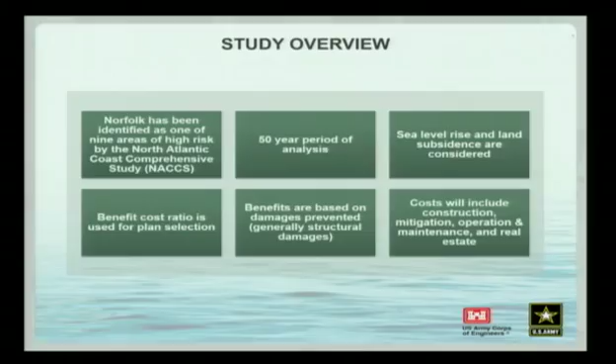It is, however, important that all understand that as we do that, the results will potentially provide the foundation for what may end up being a locally preferred plan, because our goal is to reasonably maximize national economic development. It becomes a matter of benefits and costs, but in addition to those, we're going to, as a team, collectively consider issues such as life safety, risk reduction for historic structures, protecting low-income areas of the city, and environmental impacts as part of the plan selection process.

As you might expect in a federal undertaking, there's a process we're following. This process has several important milestones that our vertical chain uses to check our work and see whether we're on track for completion, and ultimately a Chief's Report, which is the document that permits access and construction authorization—those construction dollars.

We've satisfied the alternatives milestone in October of last year. We've also provided a range of alternatives that we're considering, and we communicated our path to achieving a tentatively selected plan.

I want to highlight that there are many future public input opportunities highlighted on this slide with the star. The first will be late 2017, when the draft environmental impact statement will be released for public review, and then again in late 2018 when the final environmental impact statement is released.

But we have on our website the means by which feedback can continuously be provided and received, and we want that, because the best available information is what we want to make decisions and recommendations on.

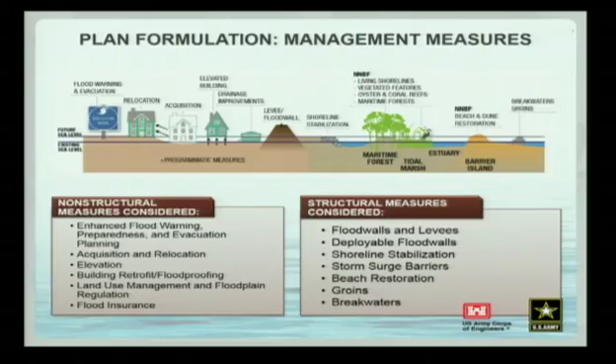Some of the named features, for example flood insurance and flood warning, are not Army Corps action items, but they too are being considered in the process.

Before I transition to Susan and we get a bit more specific, I want to leave you with this disclaimer: everything you're about to hear is pre-decisional, not final. We've made no decisions. I am seeking your input—the input of all that live here and will be the recipients of what I believe is good work being performed. These are things we're sharing now that we're thinking about, and we can only make them better with your input.

It's very important that today, if you forget everything else I've said, please know that your input is desired, and we have a means by which to receive that, and we're happy to get it. With that, I'll transition to Susan, and we'll field some questions when she finishes. Thanks, sir.

Good evening, again I'm Susan Connor, Chief of Planning for the Norfolk District Army Corps. What I'm going to do is go through some more details. Colonel Kelly has talked to you generally about the study and where we are in it. I'm going to talk more specifically about these measures we've discussed, and where we are suggesting those for potential implementation in the city.

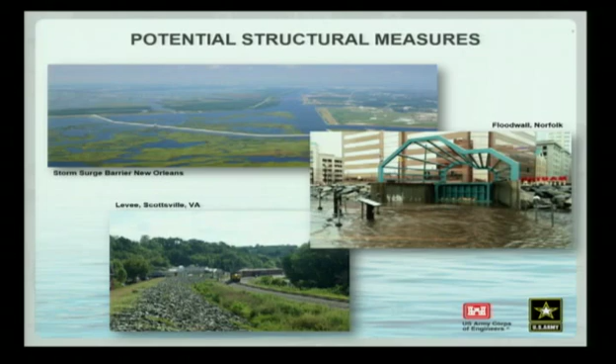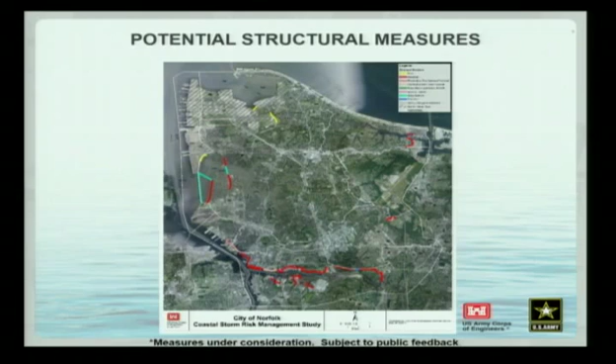Also, non-structural measures. By far the most prevalent non-structural measure being recommended, and likely to be implemented, is elevation - raising a structure out of the floodplain. But I did want to mention some other ones, like non-residential flood proofing, which is primarily for buildings like commercial buildings. Maybe they're higher and you're not going to elevate them, but there are measures we can take to keep the water out, such as closing entranceways or waterproofing them when an event is coming.

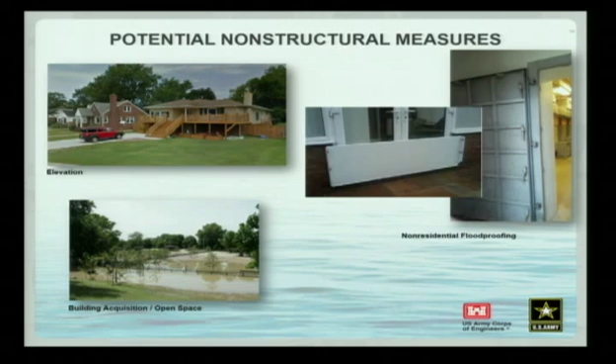And then acquisition is another strategy. I know that's one that sometimes is not well-liked. It's something under policy that we do have to consider. However, it is generally a voluntary program, so it's not something where we come in and force acquisition - it's something that would only be done if the city were interested in it. And it's generally not easily cost justified, so most structures are not viable for acquisition because the cost benefit doesn't work there.

So when we look through the maps, the non-structural measures will be shown with purple hatching. I'm not going to continue to reiterate on each slide where there's non-structural - if everybody can just keep the context that anywhere there's purple is potential non-structural. Those non-structural measures usually can be done with the structural measures - sometimes complementary to them, or sometimes if the structural measure is implemented it means the non-structural would not be needed.

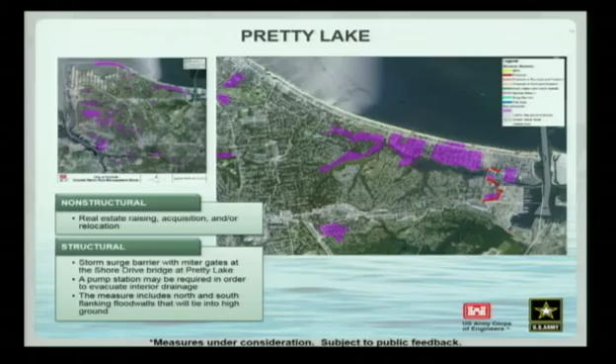So now I'm going to go around the city, starting in the northeast area at Pretty Lake. The measure we're recommending here is a storm surge barrier right along Shore Drive - it's really hard to see, but there's a little blue mark right there. That would have flood walls to the north and south that tie into that storm surge barrier, and as I mentioned, a potential non-structural measure that would work complementary to that storm surge barrier.

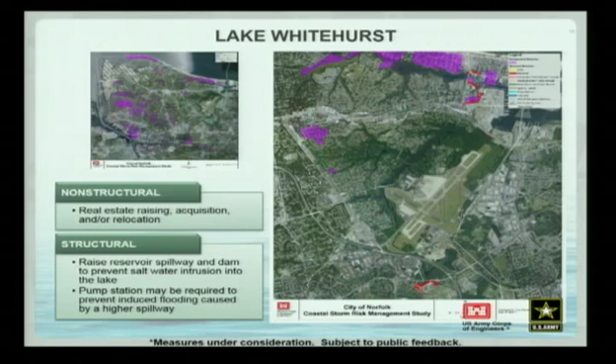So next, Moores Bridges Water Treatment Plant. I wanted to set this in here as an example of critical infrastructure, things defined by the Corps as more important to keep functional during a large storm event. For these, we actually have a higher level of risk reduction we're trying to provide.

We try to protect these to the 500-year event. So there is other critical infrastructure in the city of Norfolk. As we're still moving along this study, we haven't identified everything that would qualify as critical infrastructure, so there may be others, but this Moores Bridges Water Treatment Plant is one that we have identified.

The type of measure we would do to protect this is we consider structural, and it would include a flood wall adjacent to the plant, tying into high ground. So basically building a flood wall right around that plant to protect that critical infrastructure so it could remain functional for the city.

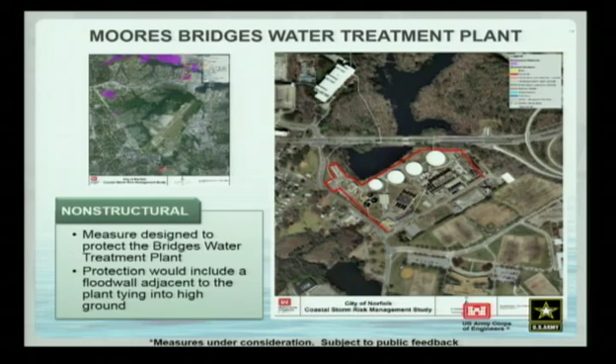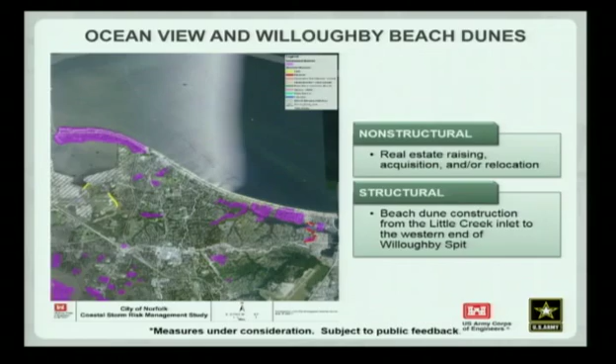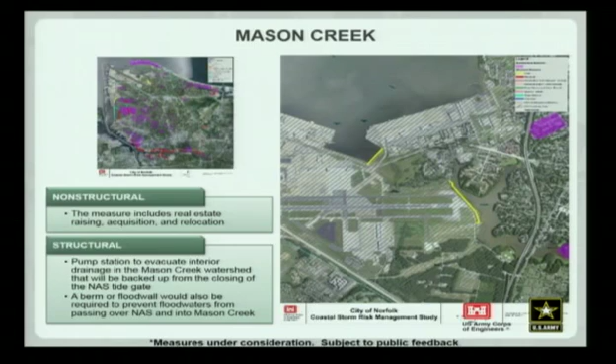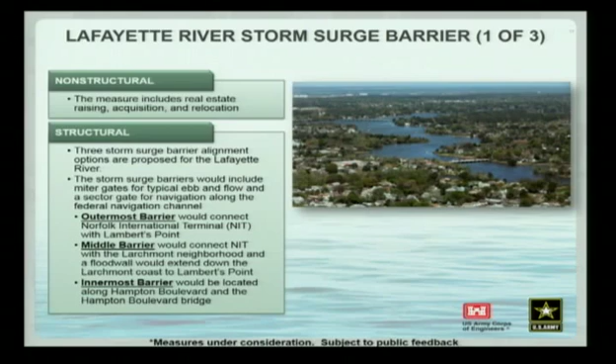To describe the three configurations: the outermost is right here, basically NIT to Lambert's Point, the longest storm surge barrier, going straight down north to south. We have the middle barrier, NIT to Larchmont, right here. This one would have an adjoining flood wall that extends down the Larchmont coast to Lambert's Point. So if we built this storm surge barrier, you would also have to have this flood wall to provide the appropriate protection to that neighborhood.

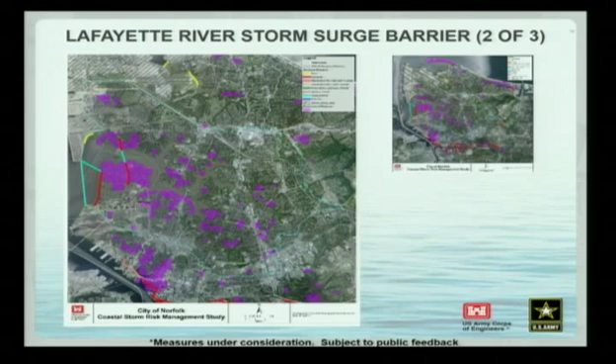The innermost storm surge barrier is along Hampton Boulevard, right at the Hampton Boulevard Bridge. That is the shortest storm surge barrier, but it has a lot of needed infrastructure to go along with it. Flood walls would be needed here along Hampton Boulevard, and those would be concrete flood walls that would run down the median of Hampton Boulevard.

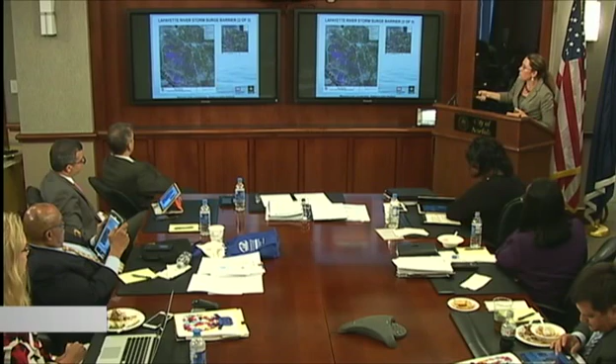Some implications of that is it would disrupt traffic patterns. There's lots of different ways - we're not to a point of design yet where we could say exactly how. You could close down intersections, or you could keep them open and have flood walls that open and close. So that potential measure does have those flood walls needed down Hampton Boulevard.

And with all of these storm surge barriers, I will say it's primarily cost benefits, but we're also looking at environmental considerations, aesthetic considerations, how it looks, traffic movement, and there's a lot of historic structures in the city of Norfolk, so we're very aware of that and doing what we can when we consider this to best protect those historic structures without causing negative impact.

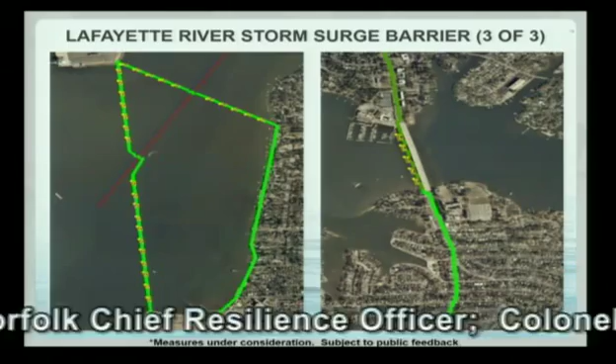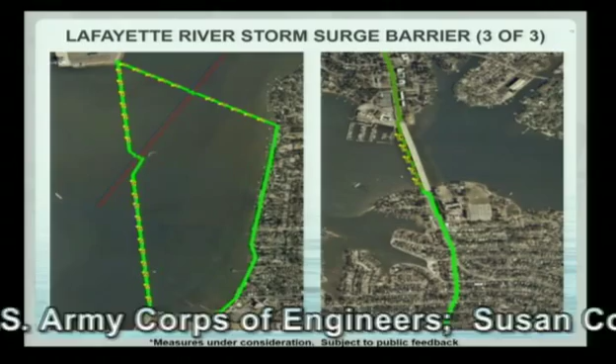This is just a closer view of those storm surge barriers. This is where the Federal Navigation Channel is. That would be the larger gate that would open and close.

In this storm surge barrier, it would be similar to the existing openings, continuing to be open most of the time. The type of events we're looking at for closure right now, we might only be talking about once a year or once every 2 years these structures are closed—not a daily or weekly basis. Because the frequency and intensity of events are forecast to increase in the future, when you look 25 or 50 years from now, these would probably be closing more. We do not yet know how much more, but maybe it's closing a few times a year instead of right now where it might be closing every year or every other year.

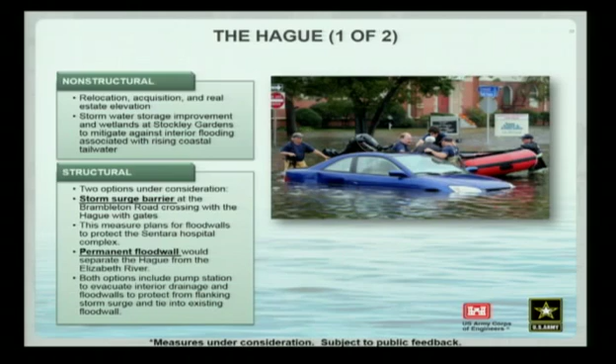The Hague is another area where we are looking at storm surge barriers. It's the only area where we're actually looking at a comparison of a storm surge barrier, as we've already described, or a permanent flood wall right at Brambleton Road to permanently close the Hague off from the Elizabeth River. So those are different options we're considering. This is one area where we're talking to the Coast Guard about their usage of the Hague, and talking to the neighborhood about these options.

Also wanted to point out that the Stockley Gardens area, we're also trying to incorporate some greening of areas to deal with stormwater drainage that would either be caused, say, if we did close off the Hague and had additional interior stormwater drainage to deal with. Obviously we would need pump stations, but we're seeing what we can do with more natural infrastructure in that area to deal with that.

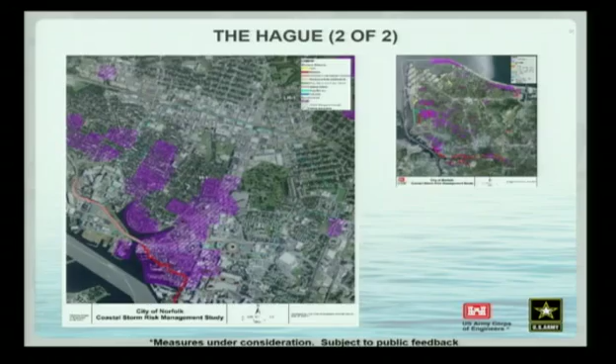It's the light blue line—I can't read the key. There's light blue lines that run through. I believe that's just the difference in our areas. It's just a highlighted area, focusing on just that area. It's not a measure that we're proposing, it's actually kind of a background part of the map.

So downtown in Chesterfield Heights, this area, there is an existing flood wall in the city of Norfolk. We'd be looking at potentially raising that flood wall. That level of detail hasn't been determined yet, but we're definitely looking at additional flood wall through all of this area where the red is.

This is one area where we're trying to incorporate an earthen berm, particularly right around Harbor Park, if there is enough area there that we can do it. That also is kind of complementary to the Vision 2100 that the city planning is doing to try and make some more walkable green neighborhood areas. So we're trying to incorporate that where we can here.

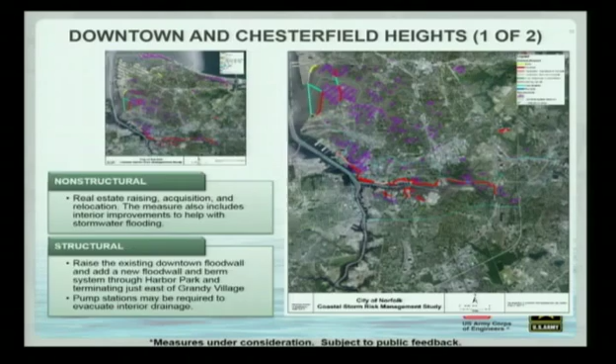So you can see right here, this kind of pinkish color is where we would try the earthen berm area.

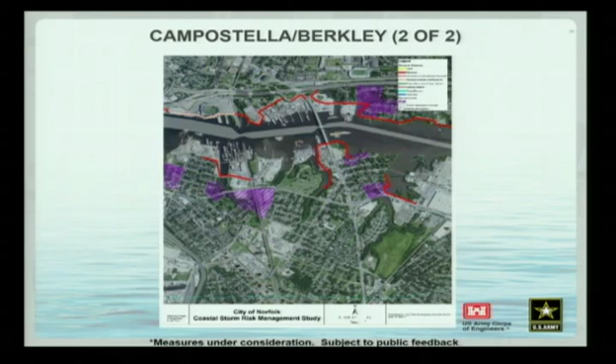So Campostella/Berkeley, here we're looking south of the river, and this really is a flood wall in these areas. Zooming in a little bit, you can see better here where the flood walls would tie in where needed along there.

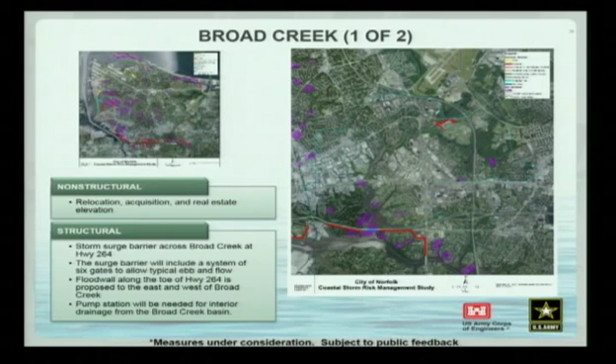So Broad Creek, this is the last storm surge barrier, right here along 264. There would be a storm surge barrier that again would operate similar to the others I've described. Also, interior drainage would be needed in this area in the form of pump stations. This is more zoomed into 264, showing what a storm surge barrier would look like along there, with the flood wall adjacent.

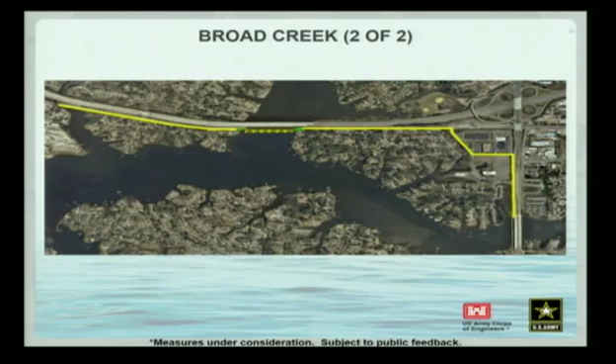So that takes you through the major measures that we're considering right now.

The way that we will look at this, we've already kind of talked about benefit cost analysis, and we will really look at how the structural and non-structural measures compare in cost benefits, and most likely we'll end up with some type of alternative that has some of both.

That'll have some structural measures, those that are justified, but then also a large amount of non-structural for other areas. We've already talked about getting to the Chief's report in January 2019. I wanted to reemphasize those other things needed past that. Once we send a Chief's report to Congress, we'd be looking for a congressional authorization for construction, generally received through WRDA, the Water Resources Development Act, which have come about every 2 years.

Then we wait, assuming we get that construction authorization, for appropriations and local funding, and a timing when those things, both the local funding and desire to do the project and the federal funding, come together to move forward on a construction project.

So that concludes our presentation. I wanted to thank you for the opportunity to present and the opportunity to partner on this exciting study. Certainly welcome to any of your questions.

Andrea: Yes, first of all, thank you, I think this is a great project. Just to set expectations in terms of where we are, there's a Chief's report, we talked about appropriations. The actual, in the best case scenario, the reality of when we could actually put shovels in the ground or pumps in the water, 8 to 10 years?